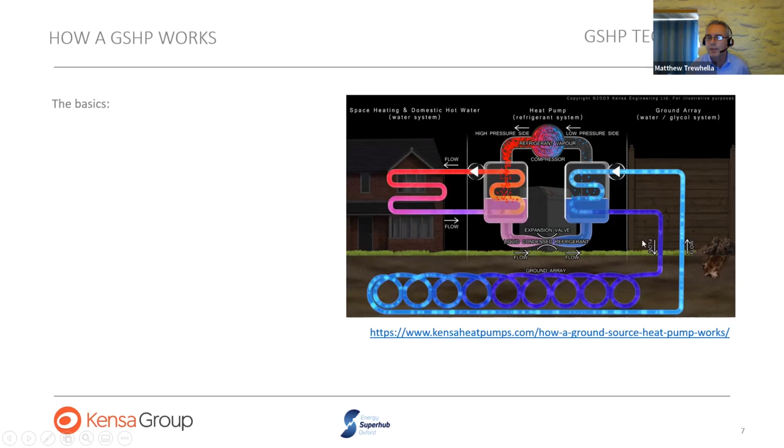So very quickly on the basics, ground source heat pumps move a very large amount of low-grade energy from the ground into a heat exchanger. That then warms up a refrigerant gas, which is compressed. It gets very hot, and it distributes its heat into another heat exchanger, which then pumps water off around your heating system or hot water. And then the gas is allowed to expand again, which cools it. So the gas just goes round and round. Typically, it's antifreeze going round and round the ground, and heating water going round and round your heating. So three separate, independent but linked circuits.

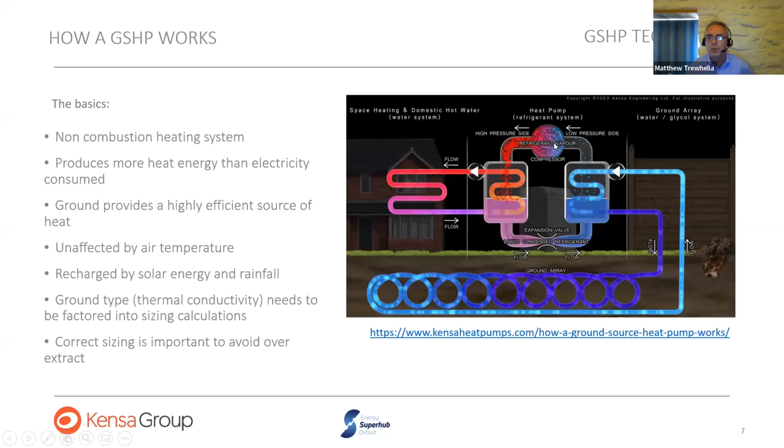The most important thing to remember is that nothing is being burnt here to produce the heat. The efficiency of the system is very high. The electrical energy used to drive it is much less than the heat you get out. And what that actually means is most of the energy in your heating system is actually coming from the ground. So just as Jeff was saying, energy is generated locally. That's very, very literal in the sense that ground source is literally generated from the ground outside your house. Typically 3/4 of the heat coming through your radiators will have come from the ground, and about 1/4 of it will come from the electricity.

That's what it looks like - I'm calling it the past. Actually, that's not quite true, we still do quite a lot of these at Kensa. About 20% of our work looks exactly like this, where you have one house, one ground array, and one heat pump. That's traditionally been self-build.

Rural areas, people think you need lots of space for ground source. If you speak to government, which I do quite often, and you say ground source heat pump, this is exactly what they're picturing. Like I say, we're already at the situation where that's only around 20% of what we do at Kensa.

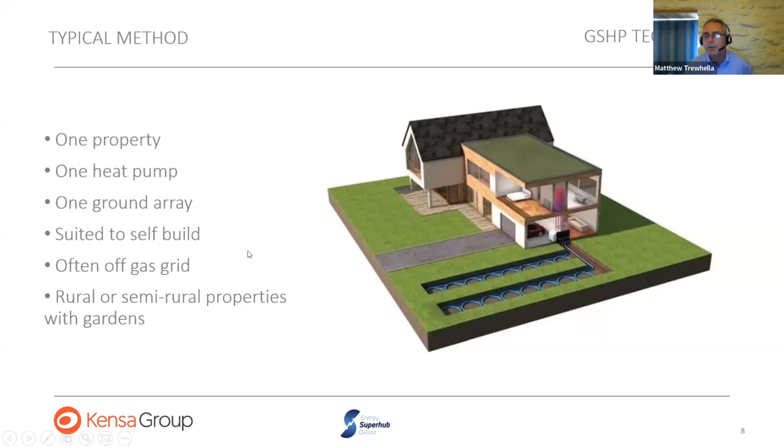What we do a lot more of is something called a shared ground array. In this case, I've shown some boreholes, but it could be horizontal pipes, mostly boreholes though. You have a number of boreholes and a number of properties, and they're all shared together. In practical terms, it's much more like the gas grid.

You've got some pipes in the ground delivering low-grade energy to your building. In gas, it's low-grade chemical energy; in this case, it's low-grade heat. Then you have a white box in your house that you own that converts and upgrades that heat into usable energy for heating and hot water.

You get loads of benefits doing it this way, not least if you were going to do a row of 10 houses - 6 of them would be average, 2 would use loads of heat, and 2 would be quite frugal. If you were designing one ground array for each property, they'd all have to assume they're the high heat users, whereas if you share it, you can design to the average.

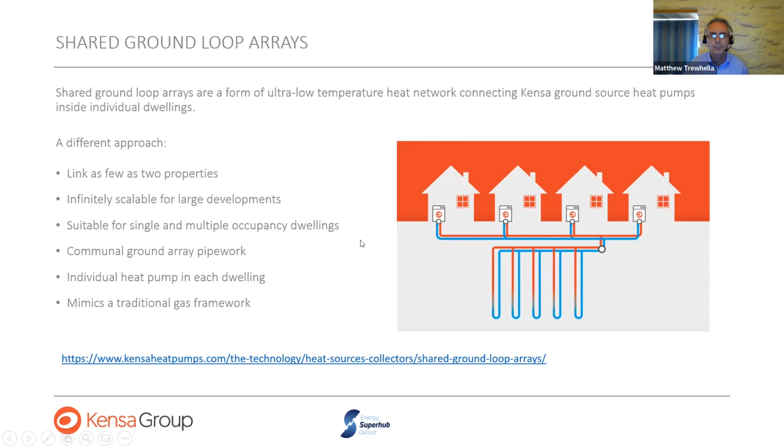The amount of ground you need to access is lower, and then you can also play other tricks like drilling deeper boreholes and fewer of them. It's much cheaper to drill a borehole to 250 meters than it is 5 to 50 meters. So we're already accessing economies of scale.

This is what it looks like in tower blocks - a series of boreholes connected to heat pumps.

One little bit of innovation, coming on for 8, 9, maybe even 10 years old now - Kensa's shoebox, which is basically a very tiny heat pump that's small enough and quiet enough to fit in an airing cupboard of a flat.

In this case, that's some flats in Sunderland, a little bit up the road from you guys in Durham. Heat pumps here where the old gas meter used to be, and there's a hot water storage, a Sunamp, where the old gas boiler used to be. Very simple system - loads more about how this works on our website if you want to follow up, but that's what we call it.

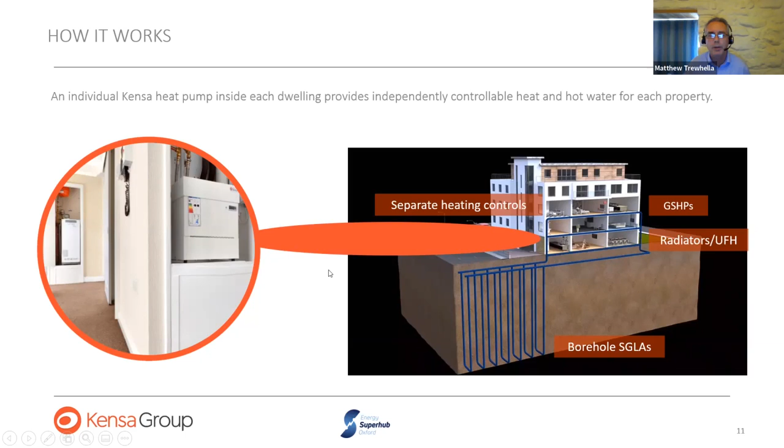It's called a shared ground array, or sometimes called an ambient temperature heat network. And that's what it looks like if you scale that up to city scales.

At the moment, nearly all of our work with shared ground arrays is in 2 main market areas. The first is new build. Clearly, if you're building 100 homes, you can put this infrastructure in at the beginning, and all of those homes need to convert at the same time, which is crucial.

It's very difficult to do a shared system one property at a time at the moment, or it's in social housing for a retrofit. So if you own the whole street already, or if you own a tower block or a series of tower blocks next to each other, then you can do this quite well.

Interestingly, where we're moving is to be more than just a shared ground array. So if you've got a network of pipework carrying fluid at around 10 to 12 degrees, then there's loads of things you can cool down using that fluid.

There's an example there from underground data centers. I'm always shocked to find out just how much energy data centers use. We're working on one project in London where the heat coming off the data center could provide heating and hot water for 15,000 flats - that gives you an idea of scale. I'm really interested in cooling down PV panels.

PV panels generate more electricity when they're cold, and that heat coming off the back of them can be put into the ground array to reduce the amount of electricity that the heat pumps use. I've left a couple of links there, and I think the slides will be shared afterwards so you can find out more about what we're doing.

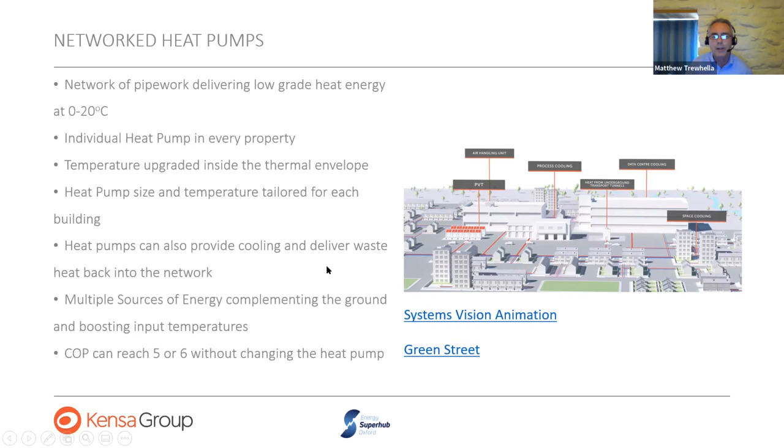We're already doing this in dense urban areas and in high-rise, like 13-story tower blocks. As we look into the future and think about wider retrofit, it's quite difficult to persuade a street of 100, 200, or 500 properties to all decarbonize their heating at the same time. So once we move off the gas network, as Jeff and Maddie were saying, towards the end of the 2020s, this is going to be necessary.

We think something called split ownership is going to be one of the keys to unlocking this. The idea here is that the bit outside the home, all of the infrastructure, is deployed as a utility in exactly the same way as the gas boiler was put in originally with the gas networks.

So in the 20s and 30s, towns were putting in small networks and people were connecting their homes to them for lighting. In the 60s and 70s, with the introduction of North Sea gas, those networks were extended and connected together nationally, and people started converting to gas boilers and using it for heating and hot water.

So that didn't happen all at once - you didn't get all the people in the same street connecting on the same day. The network was put in, and then people connected over a period of time. We think that's the exact same for decarbonizing heat now.

At the moment, if you lived in a terraced house in a city and decided you wanted to decarbonize - let's say your gas boiler had broken down - you're probably going to phone up and want a gas boiler there within a day or two, your heating and hot water back on. If you wanted to go green at that point with ground source, that's not going to be very practical, because you've got to have someone assess the ground, assess the house, do loads of design, and then book in potentially drilling rigs - it all just takes a lot of time.

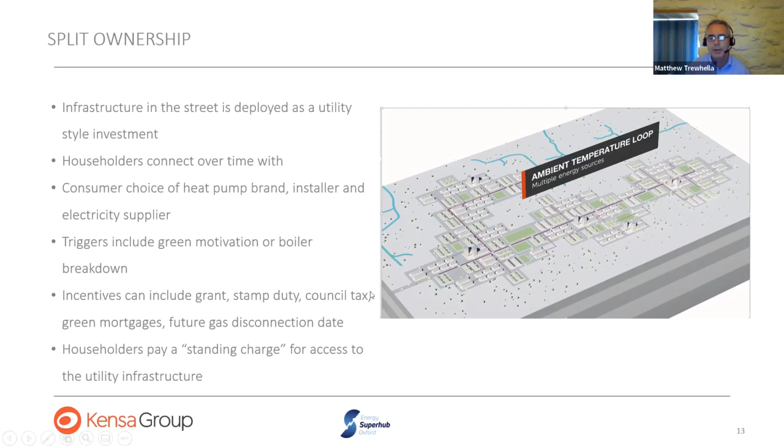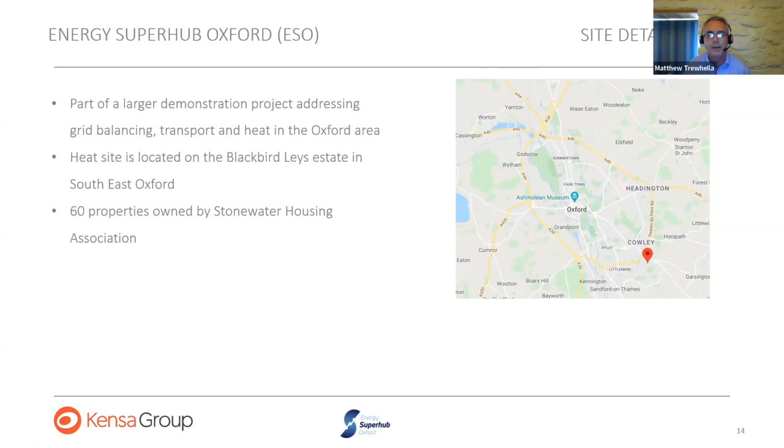That's very much like funding a kitchen, new windows, or any other home improvement. Splitting out the funding mechanism, we think, is going to be key to getting this on a large scale. So we're trying some of this at the moment in an Innovate UK sponsored project, Energy Superhub Oxford, which is how we know the network and work with it.

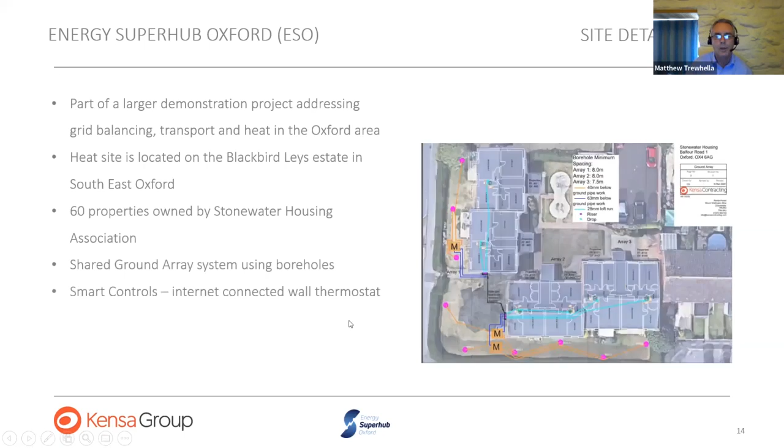We're putting in a shared ground array system. Here's a snapshot, so you can see these are 2-story flats, and here are the boreholes. They're connected together and shared out amongst these flats. Here's another separate ground array. And we're using smart controls here, addressing another of the elements.

As the guys were talking about, grid balancing and moving energy around, synchronizing the electricity of the heat pumps with the availability, both nationally in terms of generation and locally in terms of strain on the local network, is going to be key.

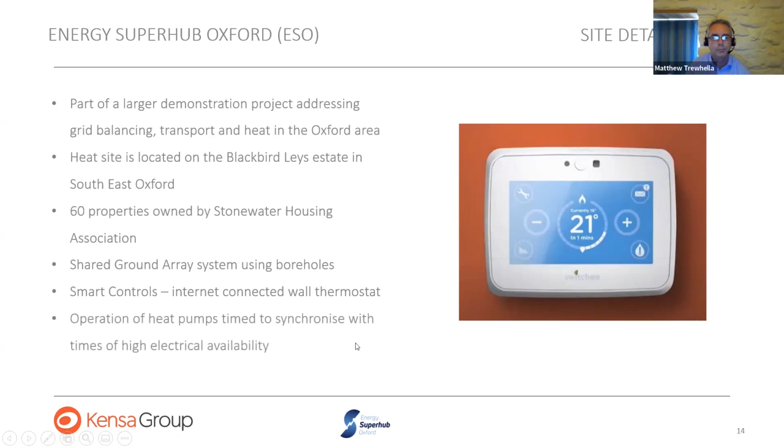I couldn't agree with that more. It's totally at the heart of what we do. So this project has a smart thermostat embedded in it, and we're actually trying that already. How we're doing it, we're optimizing on price. Here's a snapshot of an average year's price spread from midnight to midnight on a typical day.

You can see the prices varying all through the day, and you really wouldn't want to be using electricity at 4 or 5 in the afternoon. Most of us pay a flat rate. I believe these figures are a couple of years old, so probably just triple everything now considering what's happened in the last 2 years. But at this time, most of us were paying a flat rate of around 18p.

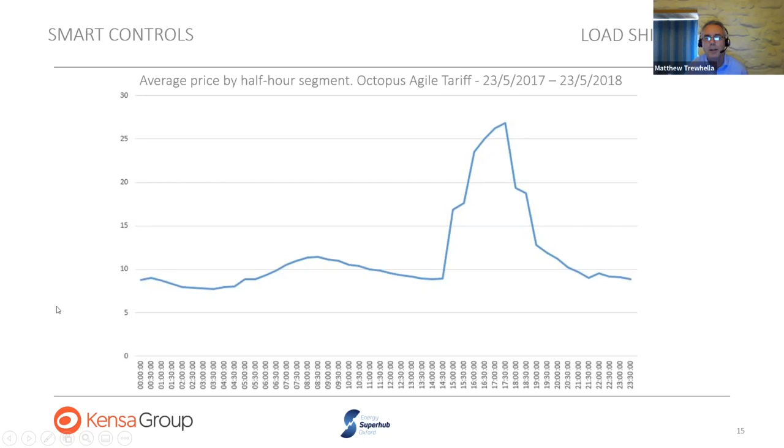That's actually made up of a variable rate. So Octopus decided to link this particular experimental tariff to the wholesale price of electricity. And the way it works is...

I've just taken an example of 4 half-hour segments where the heating might be on, here in the morning just before you get up, and here in the evening just before you come home from work. Our system will move the heat pump operation out of those time zones, so it could shift from 5 o'clock to 2:30 in the afternoon. What happens? It all happens in the cloud.

We've got the thermostat in the property that measures the temperature every 5 minutes. We've got a building physics model that learns how long it takes to heat up and cool down the building at various outside temperatures and weathers. We've got how warm the residents like to be and when, and then we've got the electricity price.

Our system takes all of that into account and sends a daily new operating profile down to the heat pump. So as the price of electricity and the weather forecast changes each day, we optimize how much of the load can be shifted. And what we're finding is you can pretty much avoid the vast majority of this peak.

Most buildings can store 2 hours or so worth of heat if you get them right. Say someone likes to be at 21 degrees — if you take it to 22 or 22.5, you don't need to run the heating for a couple of hours at least. So moving from 2 hours of heat from 5 p.m. to 2 p.m. seems to be relatively straightforward without doing anything fancy.

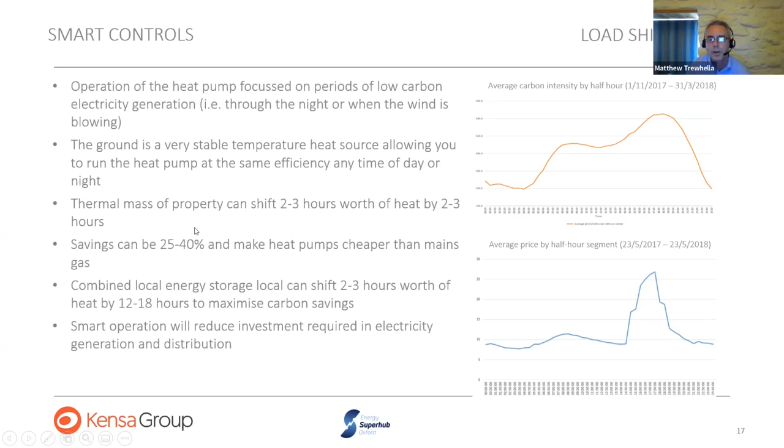There's a very nice coincidence though. You can see from these two graphs that if you optimize on running costs for the residents, you also optimize on carbon, because expensive electricity is also high carbon, and it's also when the grid's under strain. So if you've solved one of those three things, you go a long way to alleviating all of them.

So yeah, extremely fast, but hopefully that gives you a flavor, and we can tease out some of the nuances in the discussion, hopefully.

Brilliant. Thank you, Matt.